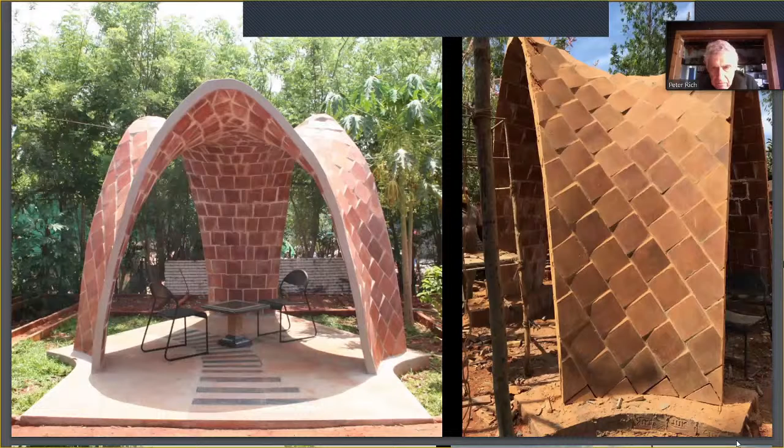He started with some experimentation of his own as an architect, using predominantly square tiles, and created a little folly in a garden.

What tends to happen with a lot of these experimental projects, you can go to the roofs of universities in America, Europe, Cambridge, and I'm sure in India, where there's always a workshop that attempts to do this over a weekend with students, but it usually ends up with something that's not usable. Also, as architects and students, you always look at the end product. You don't look at the process, or the trial and tribulation of actually getting to that point where you have the polished end product. So we're going to take you on the dirty journey to see how it happens, and what lessons you can learn from both failures and successes.

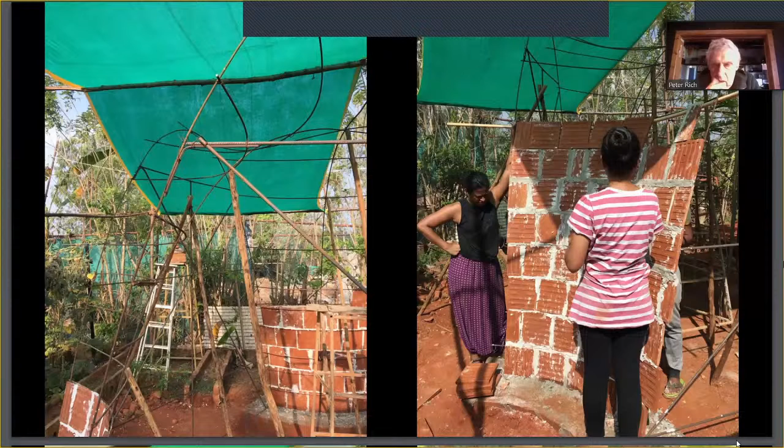A lot of these projects involve students. You have too many students, so a lot of them stand around with their hands on their hips, not knowing quite what to do. So it's an interesting thing. What I normally do is say, well, we're building this module, and the next one you're going to be building unassisted, so you better pay attention. Then you get a change of attitude, and they get involved.

But you can see here, you've got tiles, you've got fast drying gypsum, you've got shade structure with bamboo, which you improvise so well. But what's ingenious here, which we'll see next slide.

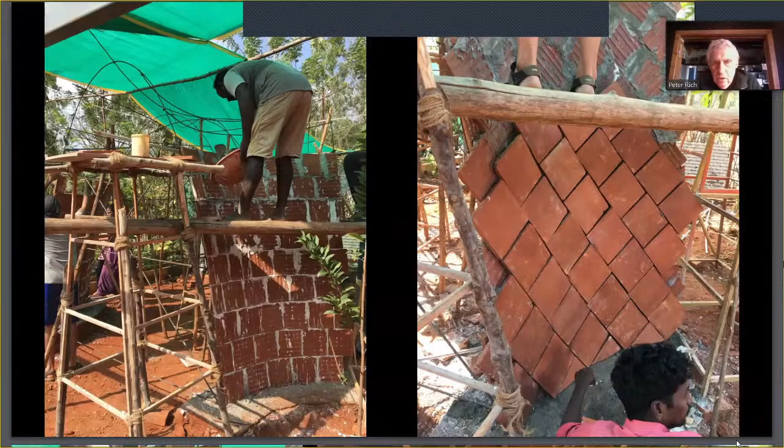What's ingenious with Cintil is that in all of these projects, the problem is how to get the mathematics right. He actually found steel rebars as the ingenious way of creating the formwork and having them follow the principles. So even MIT and the more learned schools have suddenly thought, oh my goodness, it takes someone from India to teach us this profound common sense, which I'm so excited about.

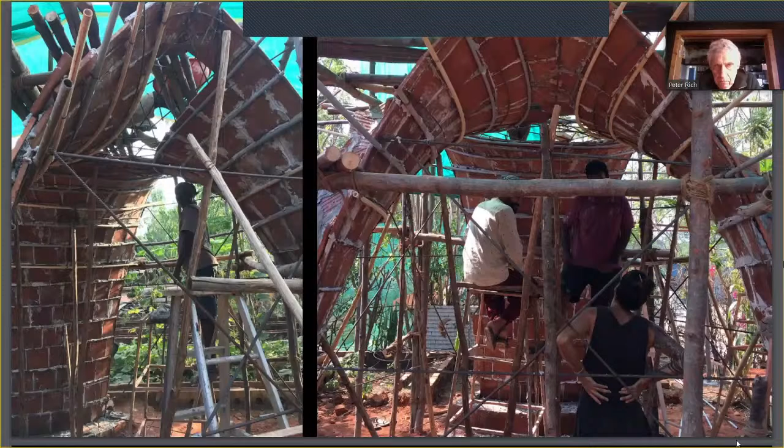You just have the courage to do it. You can see here, you've also got bamboo that has a certain level of bend in it as well. So you're improvising, and you're not going to great costs with scaffolding. And the steel rebars can be reused, welded and repeated.

Now we go to Bangalore. Here Cintil tried something in a public space, having done that first adventure, and succeeded. We can go through these fairly quickly.

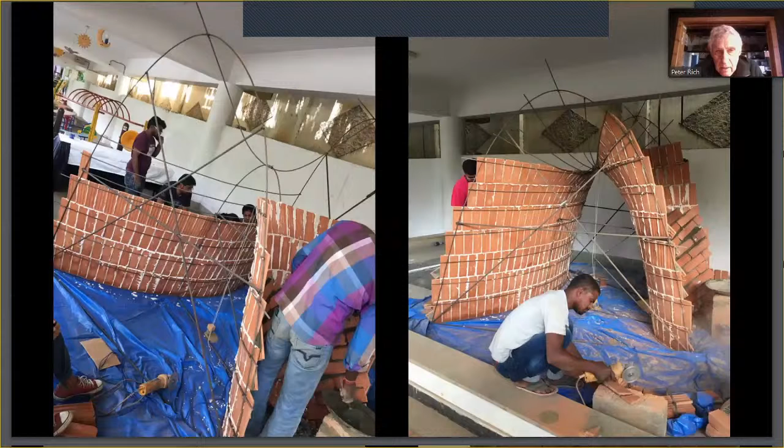Notice it's bent in plan and it's bent in section. So I said to him, great, now that you've done this, here's the process, and notice it's got the catenary arch at the end, one in the middle, and one in another place, and that gives you the profile. Then you link the apex, and then you link the side pieces.

And what does it do? It gives you a formwork. It's ingenious to work against.

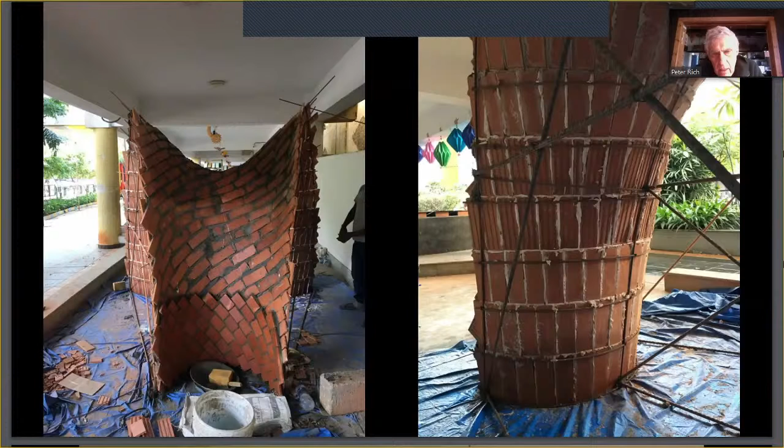He's working on a flat concrete plane, so the forces gather, and it wouldn't be as stable if the base was straight and not bent, because it adds to the strength, as you'll find with a piece of paper that you put in your hand.

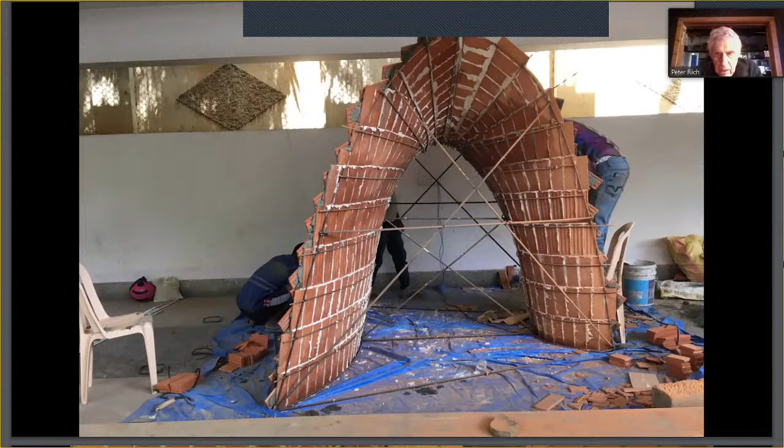And so the process goes, and then you can trim it.

It required a bit of a generator so that you could actually have an angle grinder and maybe a welding tool, but it didn't require anything more sophisticated than that. And that's what we're looking for.

That's the advantage we have in the big populated Southern Hemisphere and India, with our labor and skill, and the fact that our monetary system is not such that we can't do anything. The problem with America and Australia and places is they can't afford to work with natural materials. Everything's fired in a kiln, or be it steel or aluminium or pre-manufactured, sophisticated, high-embodied energy, because their money doesn't allow for you to work with the earth.

We have that advantage, and it actually sets up its own psychosis. Glenn Murcutt has spoken about it, where you get people who just don't have contact with natural materials anymore. Everything's slick. It's like you go to America, every university is like the inside of the latest motor car. And you actually yearn for the haptic sense of touch. You yearn for the smell, you yearn for the taste. I've designed some buildings where people actually go and lick the walls.

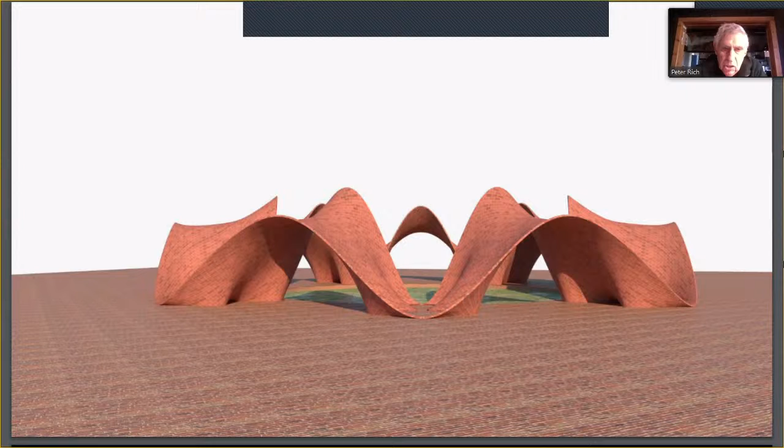Everyone tries to actually do this, but what you don't realize is that at certain points you're putting what wants to work in compression into tension, and it's going to snap. So, wake up call.

The Care Workshop in Tamil Nadu. This is where we interacted.

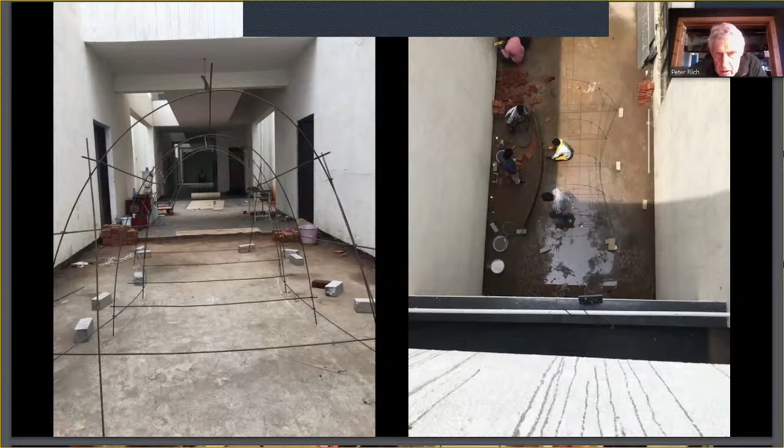He had done some preliminary work within that beautiful complex of buildings designed by Sanjay Mohe. I think it's a wonderful, wonderful school, and just the way it deals with climate and environment, and what Sanjay's learned from the IIM that he's had the pleasure of working in, of Doshi's in Bangalore.

And so here is, again, this idea of a long fluted cone. Cintil's learned that you need to actually not make the base straight side walls, you bend them. We can go quite quickly now.

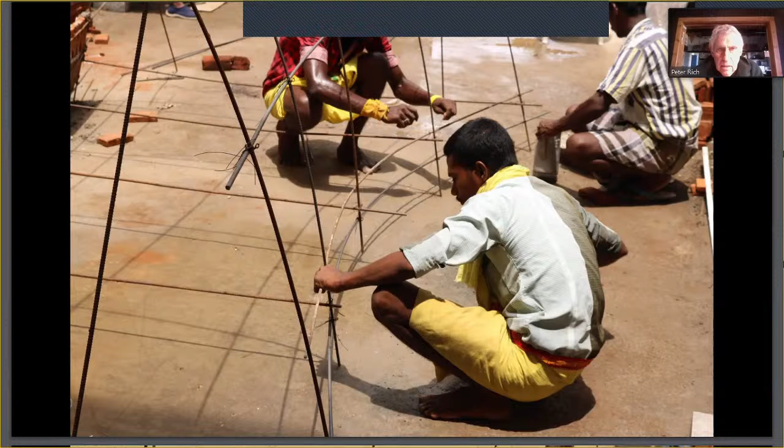And so with those fundamental lessons, he can build. He's also realized that it makes sense to get a more rectangular, smaller tile rather than a square tile, because it's just easier to work with.

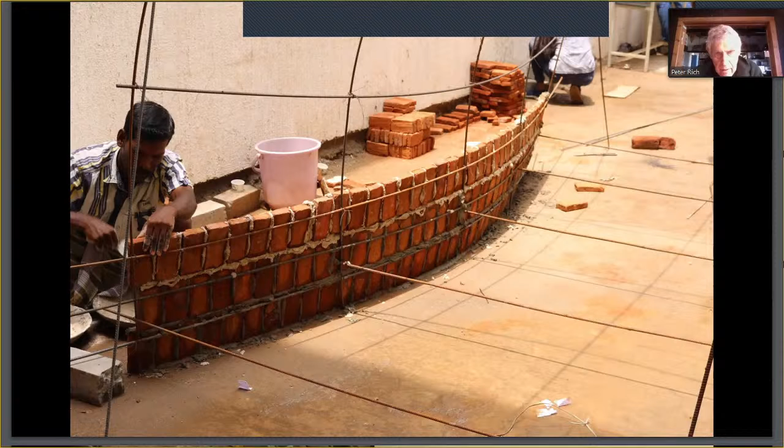And here we are, your three first courses. Hooray. And you just keep going. And it's fast drying cement.

You've got enough guidance, and you've got one team on one side and another team. They might not meet directly in the middle, but if these are handmade, as these tiles are, you tend to get a much nicer effect than you do from fired tiles. You're cancelling out the embodied energy, but because of the handmadeness and where they don't meet, it becomes a little bit like that beautiful mend on a calabash, where the mend becomes the artwork.

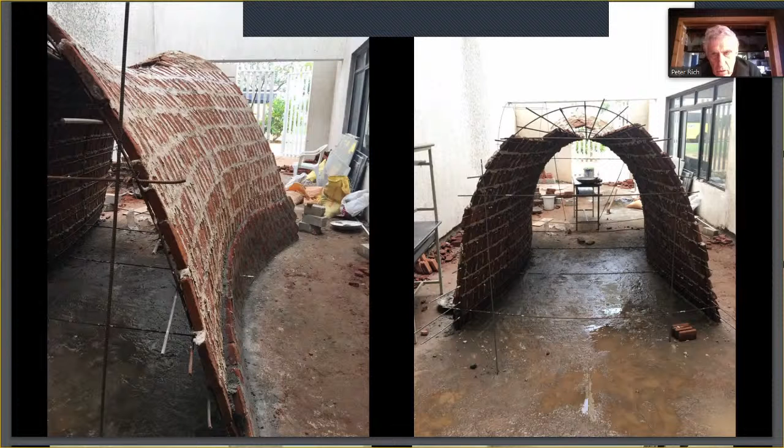Okay, almost meeting, and then meeting. And then the second layer of tile bonds it, usually on a diagonal. Then you remove the shuttering, and you're overwhelmed that you've actually succeeded in this. A lot of water and a lot of mess.

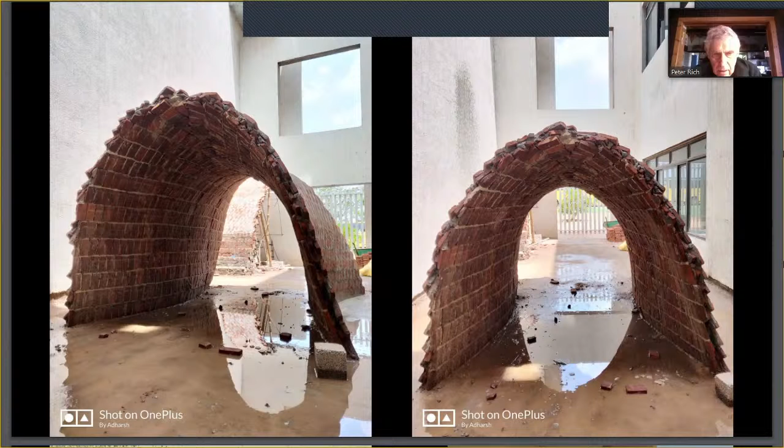But behind, in the corner there, every Timbrel vaulter wants to build a staircase that does this. They had a rather unsuccessful go at it, I think, overcome with enthusiasm but maybe not the skill. It didn't quite mature, but they'll build it eventually.

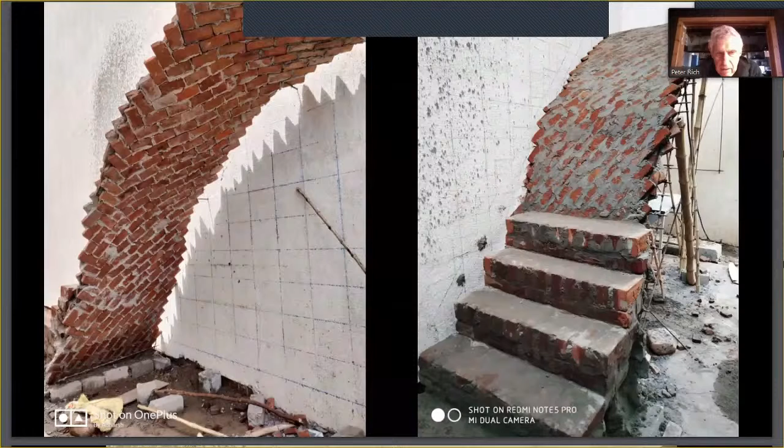You do this and then you put the treads on it. And then you get the one that's actually spiral, which is so captivating because it flies in space.

Okay, this is the one which we did. No, sorry, I'm jumping the gun.

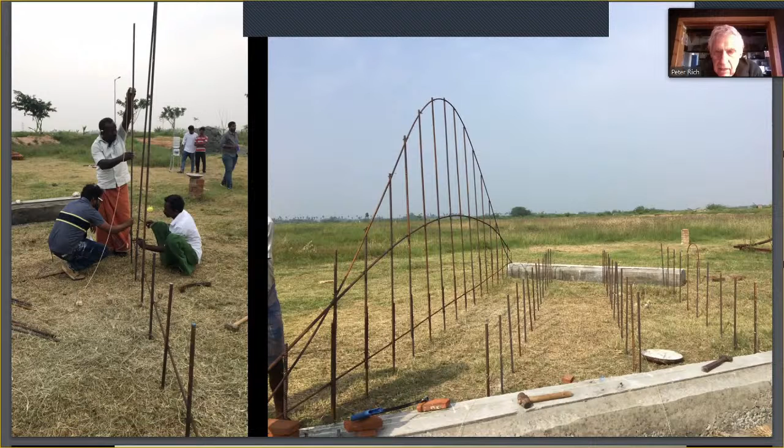He then went out into the field at Care, with the dormitories in the distance, and tried to be very experimental here. He wanted to build something actually much bigger. So here we are, he's setting it out. He's building it on the grass, but he's having the side horizontal bearers, which are concrete.

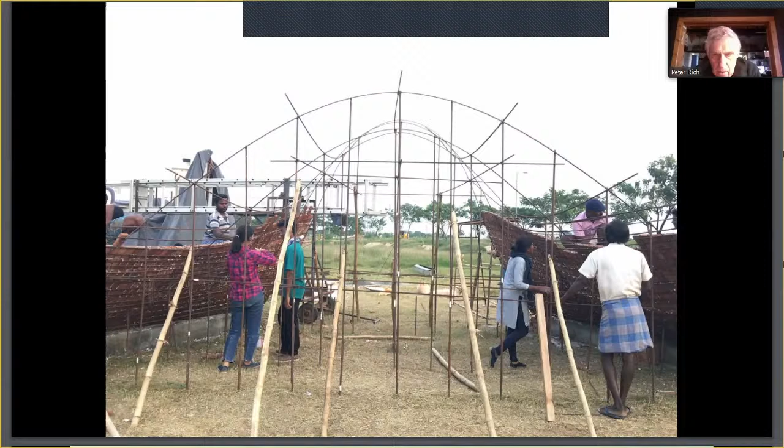Now you'll notice here that what happens is you get the double curvature, but when it gets down towards the ground, it starts flaring. That's the last thing you should do, because instead of the natural force wanting to get to the ground, you put it in tension to go sideways. We'll see the outcome of that.

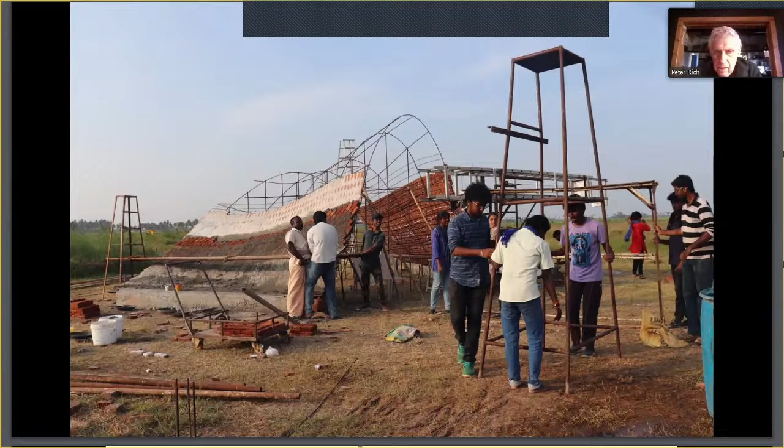But I just love the enthusiasm. And also it ends up being straight, not curved at the sides, so somehow you actually contradict the principle.

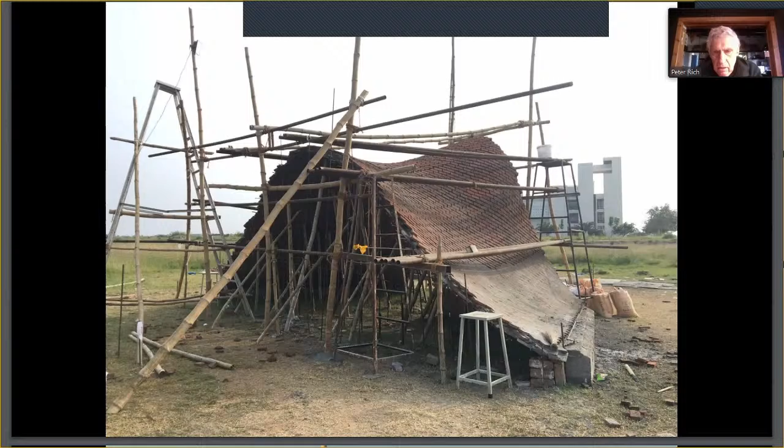So you see, you want to give it a bit of flair, and you literally give it a bit of flair, but I'll show you what happens.

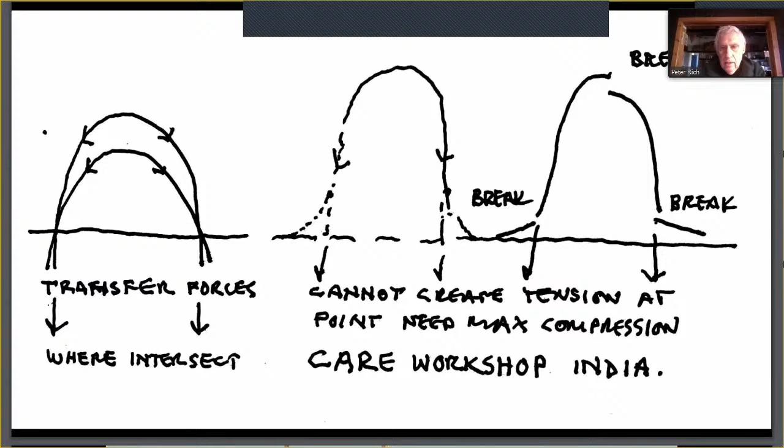When you bend it like this, it wants to go straight, but it doesn't, so it's going to break. Let's have a look at the next one. And it does break. It breaks at the sides and it breaks at the top, so the whole thing collapses because it's put in tension.

Okay, here's the one where we meet, in December 2019. And we had a wonderful few days. What we wanted to do was show them what they tend to do in Spain.

Everybody gets given a piece of cloth and some plaster of Paris, and you make a shape with wire and dip it in the plaster of Paris, and voila, you've got a model of what your thing is. But to make it, and to have the formwork that makes it, is the perplexing thing. We'll show you how, when you get into model making in the studio, it always ends up being this gloopy, floppy thing that isn't very convincing.

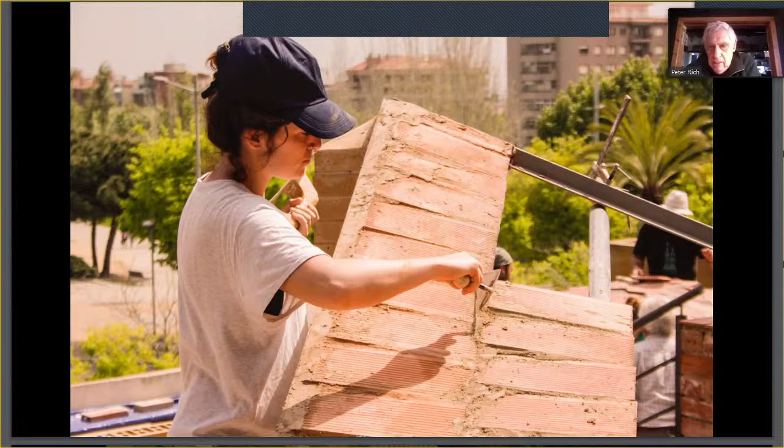This is in Valencia, which is the home of the Catalan Vault, with some steel structures providing an end. And we'll just go quickly through these.

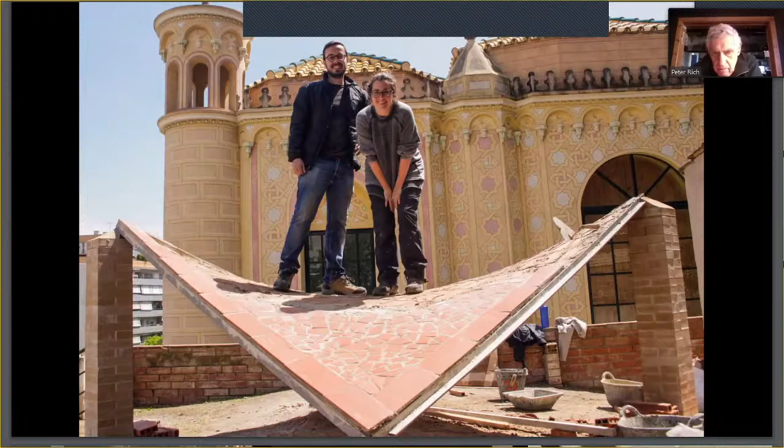And it's a weekend situation. Next, you can see that you get a very nice finished product, which becomes part of a yard. It's not necessarily useful to anybody, and I'm now getting schools of architecture - whenever they do something, it actually acts as a piece of furniture, which is space making.

We in South Africa are finding that in a rural area, if we just introduce the whole business of access to data, in other words an iCloud, we can actually, with a Timbrel Vault, generate a whole new public space just by virtue of that. That's where the youth are going to gather, because they can have access to data. They don't have to go and line up next to the bank in town where they can only get data.

And the model building - you know, let students have a go at it. They tend to get a bit complicated. They find it's difficult to actually make the form. If you're going to put it on a printout, it really cheats because it doesn't help you with the process.

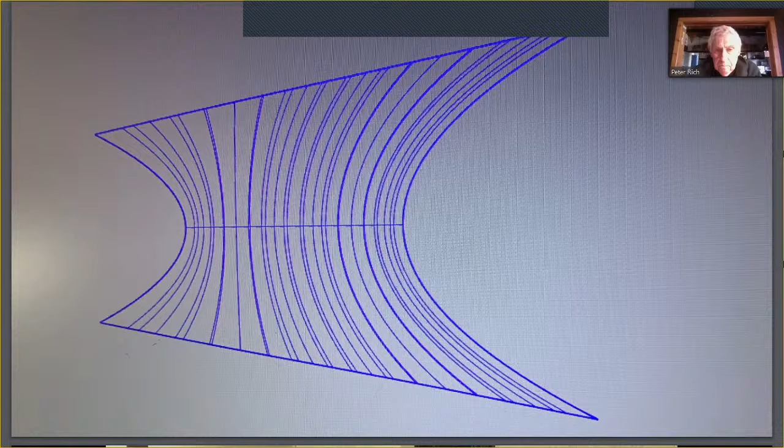And then we said, okay, we've got these wonderful areas where we can do it. And on the right is Belinda, who's the head of the school, who was present night and day. And we said, okay, how do you actually set this out? How do you start with the mathematics? And how do you get in? We photographed the process, and we got the students involved.

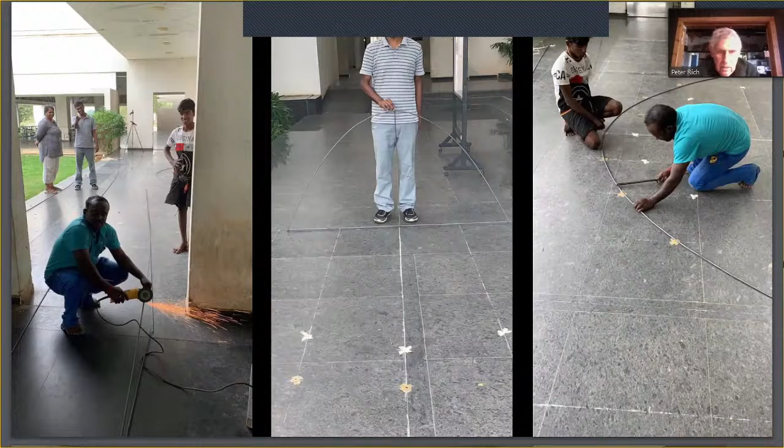And notice you've got a linear line, so you're working orthogonally, and then you inevitably involve the maintenance man and some villagers because they get empowered, and you can actually extend this whole lesson, as is going to happen with Surya's project.

And here's the relationship of the dining hall across to the residences, and we're going to build on this site where we've got a little bit of unevenness, but it doesn't matter. So the process starts.

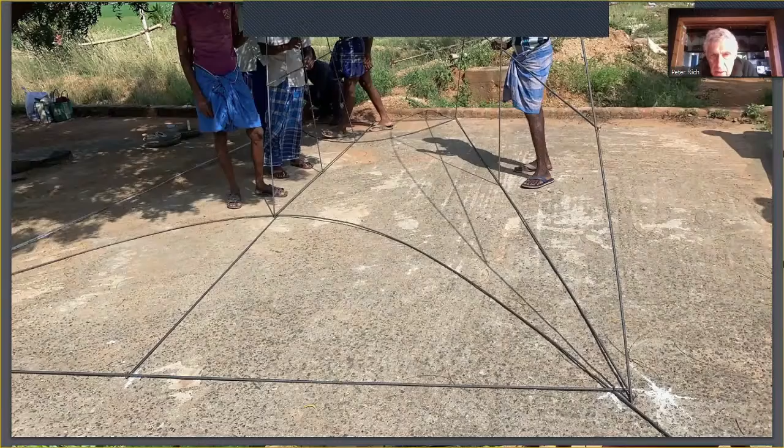Okay, and we're getting the two ends right. We're getting the middle right. We're getting the central one right. And then we're doing the weaving on the side.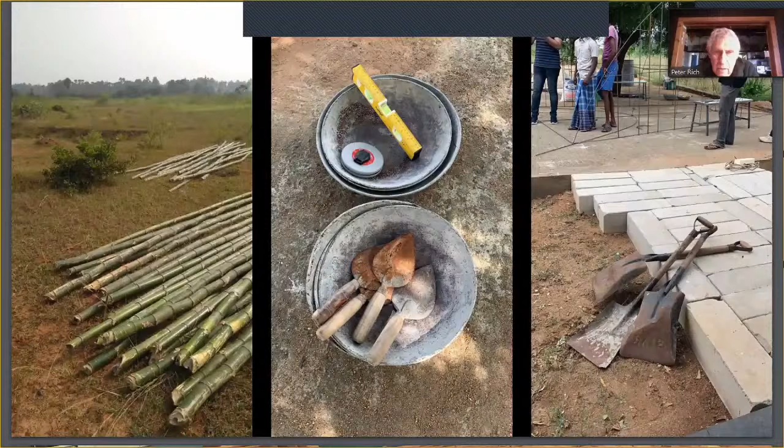But then you've got the villagers and you've got the other skills that come to the table, which you're so fortunate to have and which need empowering in the context of India, more and more so. And you've got them coming to the table because there's pending rain and monsoon, and there was a cyclone going to whip off from the east coast.

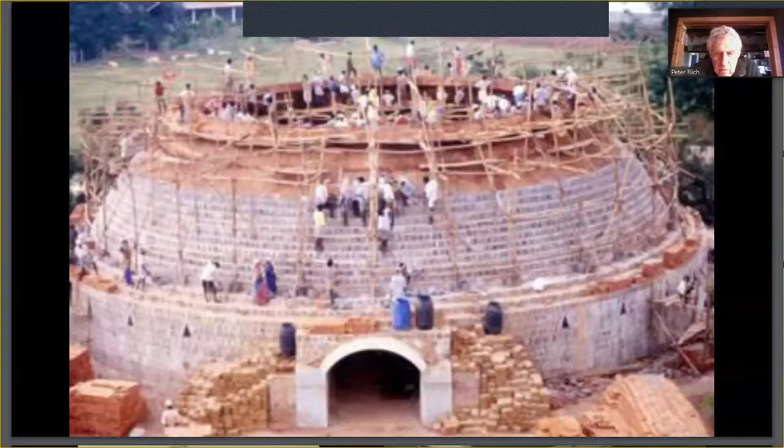Next image. And the tiles, when we built Mapungubwe, because we were working with Cambridge University, with one of the pupils of John Ochsendorf, Michael Ramage, their civil engineering department said, let's see how weak we can make a tile. So we only made it 4 MPa with 5% cement, which was hand-pressed and cured.

But you have this tradition, you've got to go to your great Buddhist temples and elsewhere. It's all lurking there, it's all there in India. You go to Hampi, you go to Mandu, you see little bits of Italy, you see what happened along the silk trade. You see the hybridity that happened and the swapping of ideas and the trying to develop an identity in one way or another. But there's this incredible inventiveness.

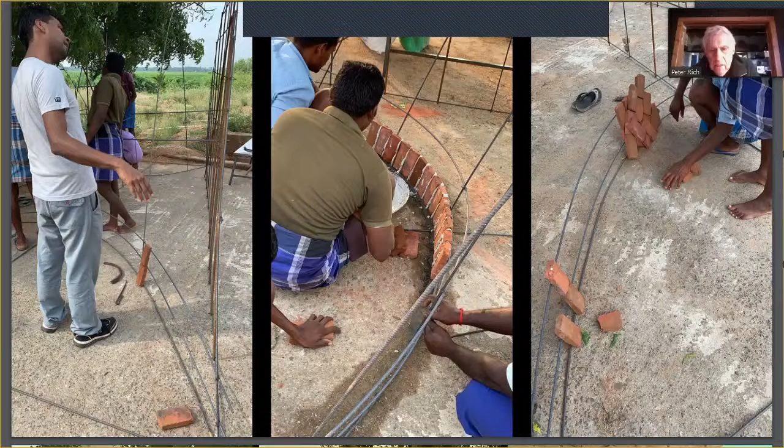And you need to, while you're doing something like this, visit the temples and visit the flower market to get away and then come back, because it's part of the journey. It's not just being there.

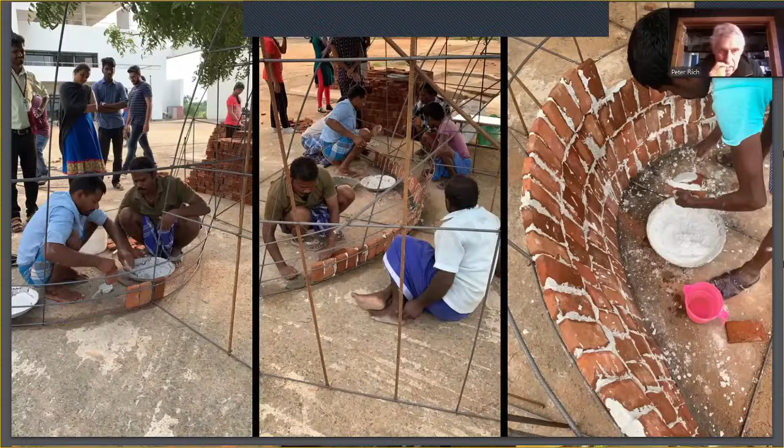Some mistakes are made, they actually get corrected, and then you actually get a real production line going, and you find who's good at things, and they take a leadership. And what you need is several of these being constructed at the same time, but we didn't have the budget. Hopefully after COVID, we'll build the subsequent ones as an exercise each year until the whole entrance sequence is ready.

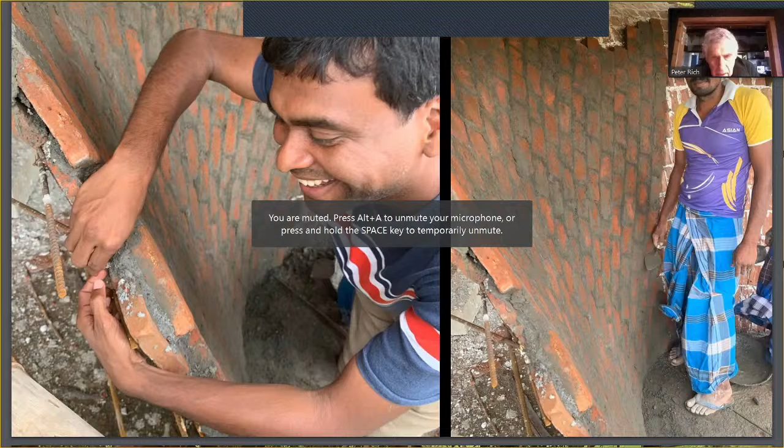There's Cintil in his element, because it's really working. And just the discovery that your second layer of tiles goes on the diagonal, because that's how the forces work. And then you put the other one going the other way, so it gives you this triple strength. But you have to decide which way you want the tiles to go to read underneath, because that's your ceiling.

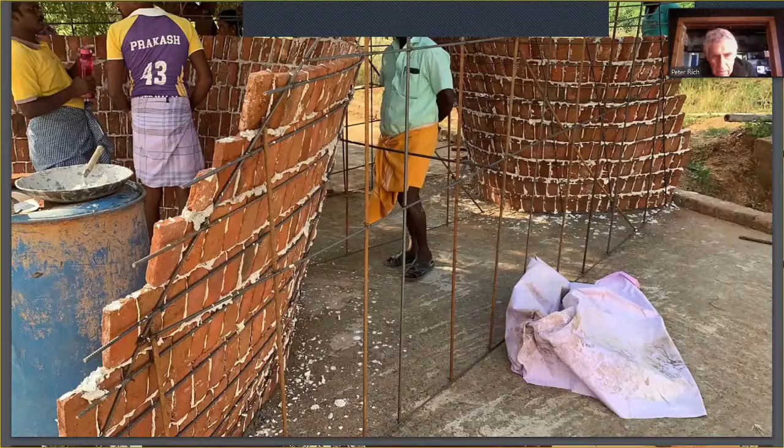And there's the ooze. You'll see when we worked for Prince Charles in London, he wanted the ooze, but you can clean it up. And students started really participating, realizing we need to get the tiles, we need to hand them on, there needs to be a production process, we need to coordinate.

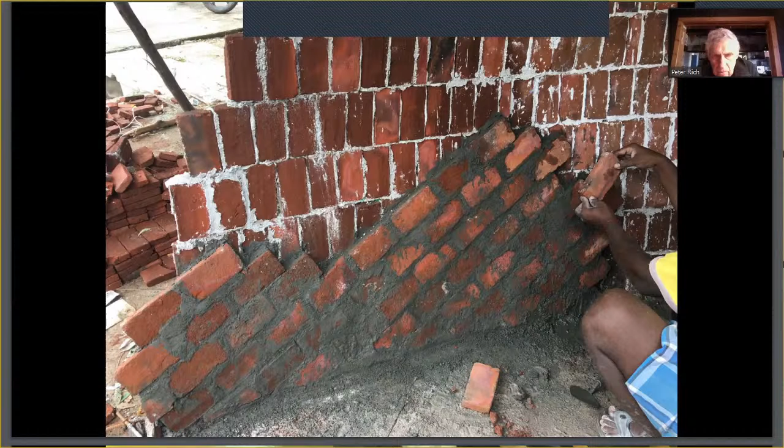And yeah, the diagonal. And you don't need particularly skilled masons. It's quicker, but the students started getting pretty good at it.

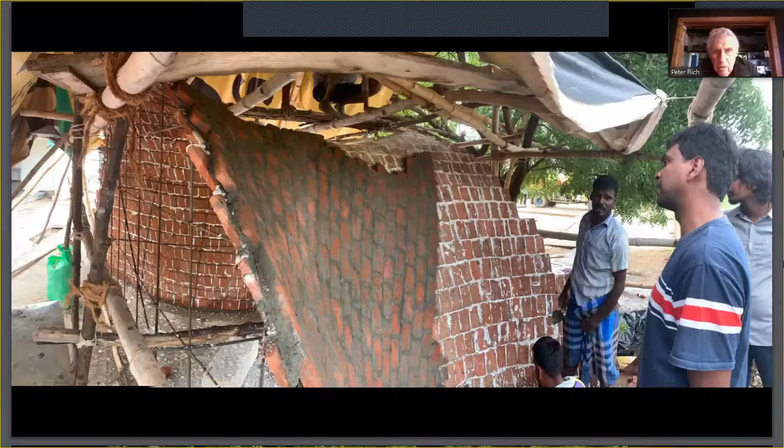We got our structure up because the rains are coming and we want to work while it's raining. And suddenly we've still got our spider's web - I like to use the analogy of a spider's web, because a spider's web's got a structure to it, it serves a purpose.

Here, Cintil has come up with a formwork that follows the mathematical lines of force, and it serves as support structure and guidance, and can be reused.

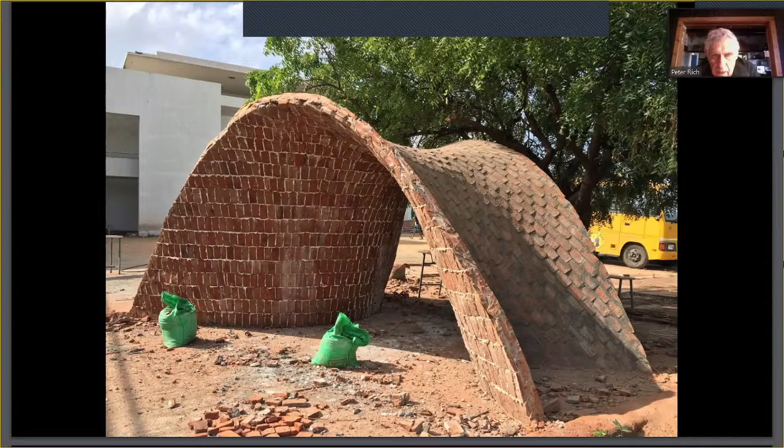And then the trimming that happens and the finishing. And it happened to pick up nicely with the afternoon sun, and stands very nice and complementary to the very orthogonal architecture of this particular Sanjay Mohe building. And celebrates the tree.

And the classrooms are open like this, so you have outdoor spaces, and you have all the lessons from the IIM and the School of Architecture, which are marvelous because you're in a village. And there's that web between inside and outside.

My book talks about that. Juhani Pallasmaa talks about, in my own work, the weave that I do between indoor and outdoor spaces, but also the weave between understanding different geometries that coexist with one another. But it's very, very worked through and understood with iteration after iteration after iteration, that it becomes this very rich environment.

And this is meant to play, but you know, we got into dance. Students found it very funny, but it's fine. I'm from the 60s.

And then just a reminder about these 5 elements here, we built the next one. You'll see once you build others, you start looking at permutations. If you build them identically, you can get this very nice walkway where you have head height, where these subspaces occur, and they start defining spaces of their own where you can go and sit. So you can take a place that has no articulation.

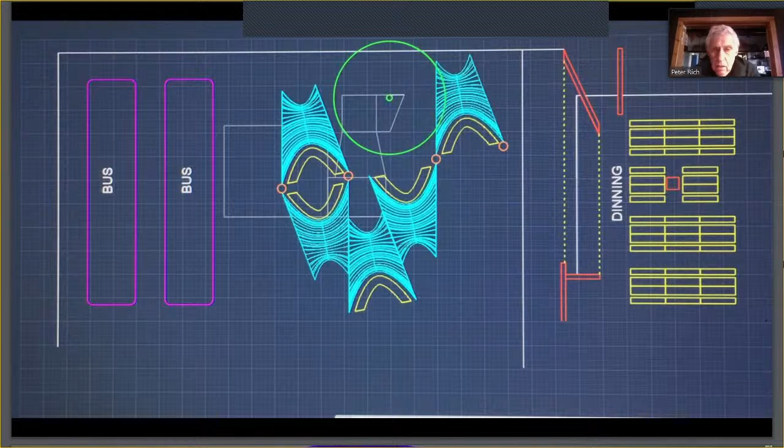Okay, just a reminder where we came from. So there's the theory, there's the mathematics, there's the practice. Get hold of the BBC program called The Code, and it shows you there's maths in everything. There's even maths in the way a flock of birds fly. There's maths in the statistical number of fish a fisherman's going to catch. There's maths in the way people move across a big space, and if you put an object in it, how it alters that.

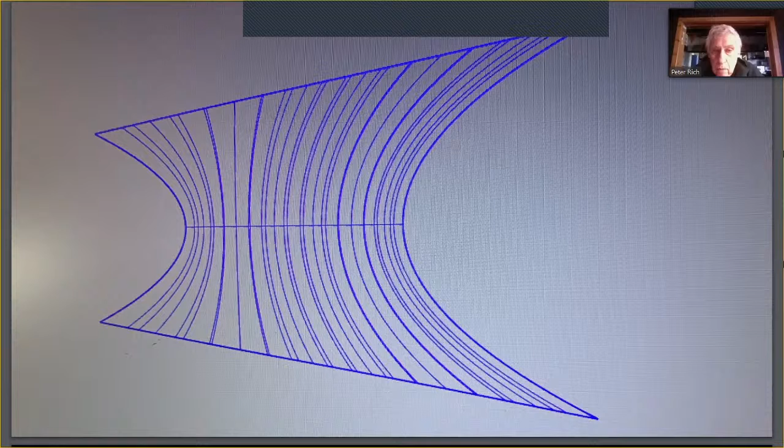And you don't have to become a mathematician, you just got to actually think. When we won the Earth Pavilion in London, Prince Charles asked us if we could—he was going to have a tea party, and he wanted, on his lawn of Lancaster House on the Mall, to demonstrate to the English innovative ways in which you could think differently about being green, for want of a better word. And we built this.

We had 14 days from the phone call to walking through the building. So we had to think, we had to design, we had to think about flying a hand press over there, making the tiles, and then what sort of formwork do we do? We bypassed all the conventional ways.

We had the organizers of the Earth Awards second a project manager, who we sent on holiday to Italy as a way of getting rid of him, because it would never have happened. And we got hold of a colleague of mine, Tim Hall's, some set designers who quickly made some formwork for us. We didn't have Scud with us at that time. We got bicycles, we got a builder, we got a female mason, and we just did it.

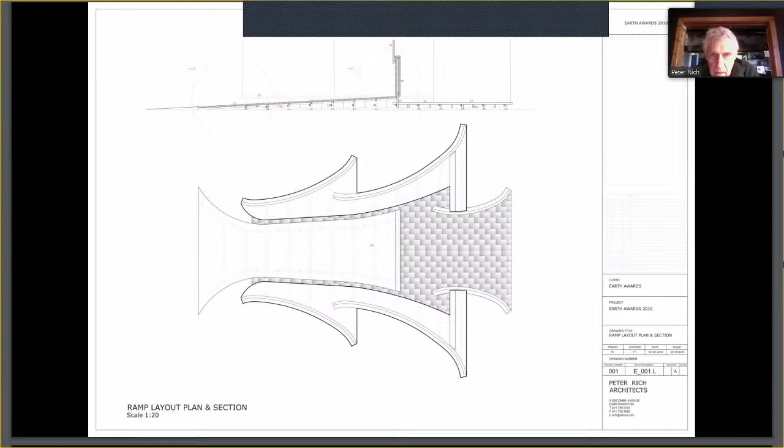And, you know, we needed the curvature, and they really liked the fact that we had this idea of a series of cones that went through one another. And this has led to lots of subsequent designs.

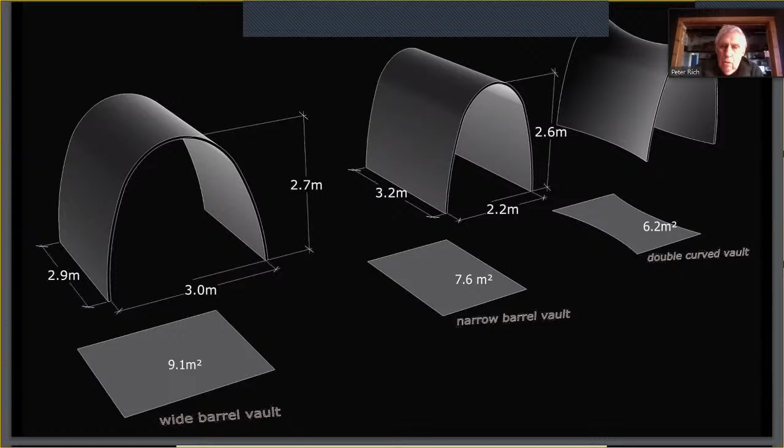You can see here, you've got the wide barrel vault with the sides straight, but that's going to be floppy. You need to go to the right-hand side where your two sides are bent as well to give it strength, and you also need to bend the top of it. So then you've got strength happening in section, in elevation on the roof plane, and in plan. And that's the way to go.

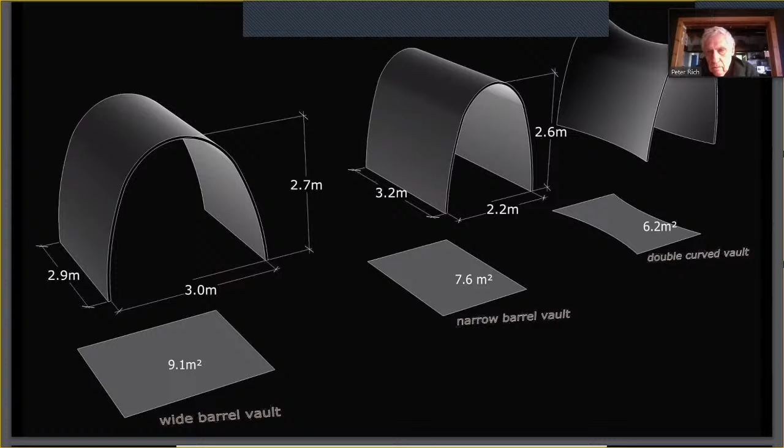And I did some drawings very quickly and sent them over. Prince Charles insisted on these pieces of timber, which we used from—it's the intrusions into the game parks, which is called sekelbos. You take it out because it's an intruder. We used that, but we ended up using cherry blossom here because he liked the roughness of it, because he had seen it and it captured him. Notice how we bend this to actually form the gutters. But as soon as you bend, you've obviously got to get more skilled as a mason, because your tile has to be cut.

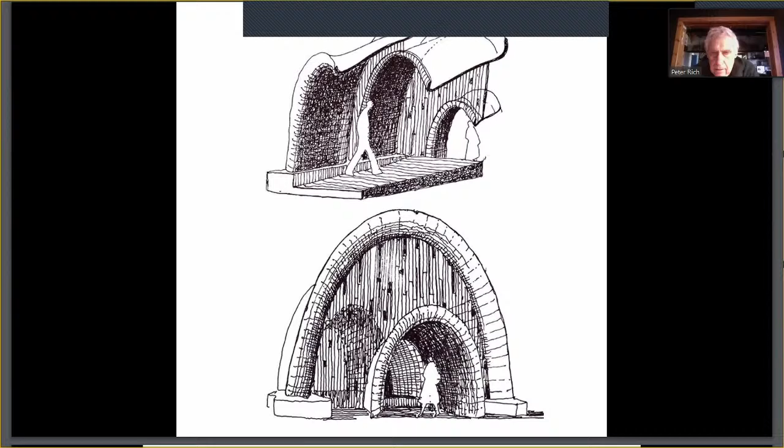And here we had it with straight sides—doesn't work. There we had it like that—works better, but still doesn't work. But this was on the computer. We solved it in an analog way.

And there we are, it was a temporary structure, so we actually put down chipboard, which was raised. We built on the chipboard, and then we took it from there. And all our detailing is done this way.

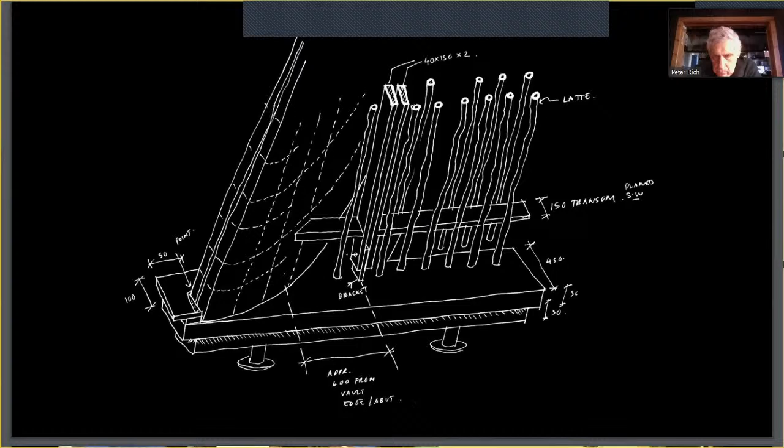And these pieces of timber we used in between the tiles, we used as the flooring and for the exhibition. So we reused every aspect of it. That was a great success.

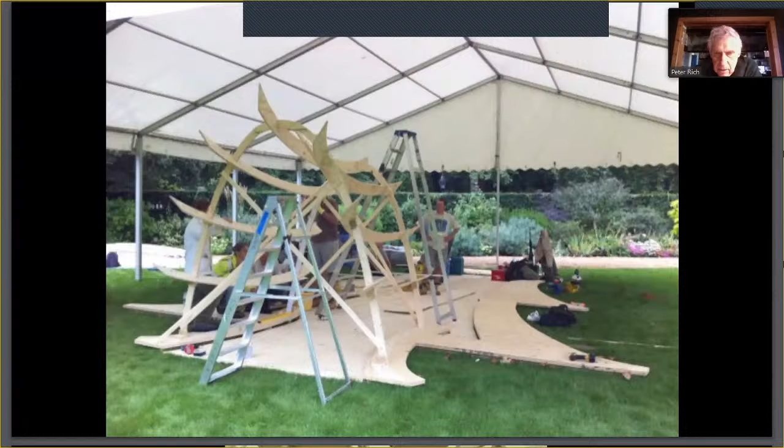And here, it rains in England intermittently, so we put shelter over. That's how we did our formwork, just done by set designers digitally, no problem. You got ladders and we started. And a lovely young woman in her 30s from the south of England just was in her element.

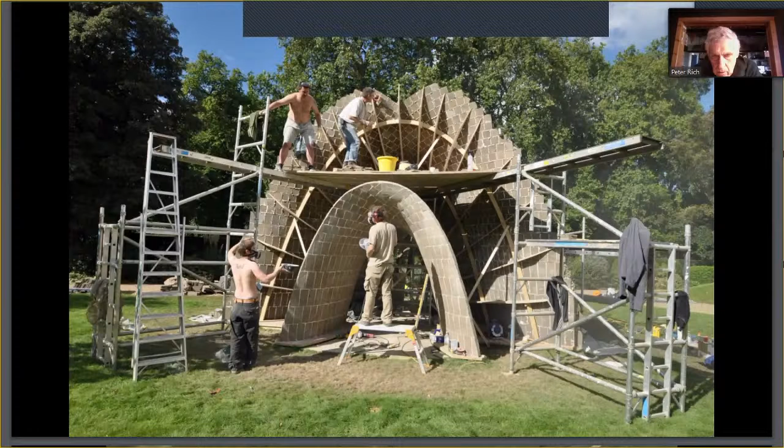And it worked perfectly.

I think it's the end product. And it's interesting, we did one of these in Chicago for a billionaire, and he loved the ooze because he says everything's so high embodied energy and machined in America. People don't know how to make buildings that are delicious, that you can smell, you can touch, and you can eat. I want the ooze to happen because it gives a shadow line and it gives character.

Here you can see we've actually taken what we used as the elements for making the tiles, and we've used them in the exhibition and in the floor. People loved it.

This was meant to be dismantled after a couple of weeks. Because of the 14-day time frame, we couldn't even think of how we could, even though it was made in 3 sections, transport it somewhere else with a forklift and put it down. We just didn't have time to think on our feet.

Now, at the start of COVID, we got this request from a wealthy person with a dream, from London. He'd seen our work. I was in India - this is really done by the office, not my work, but you have to give some leeway to the office. Basically, he wanted to design a dome where at a metaphysical and philosophical level he could come to terms with his place in the world.

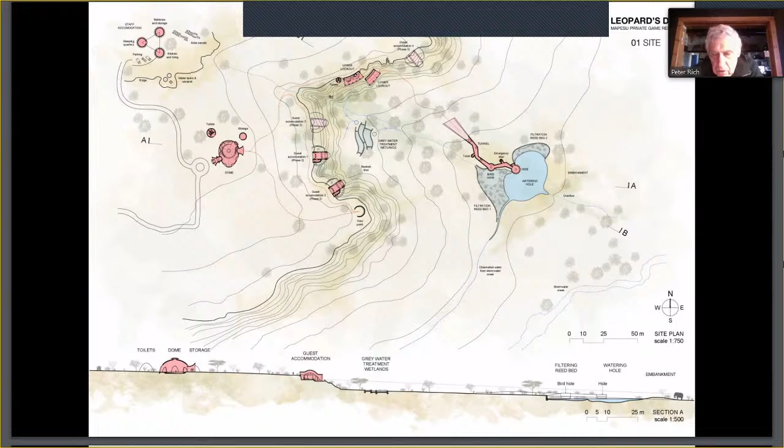But I'll show you why I'm showing you this - I'm also showing students, you need to dream. How do you, at the edge of a cliff face, just create a shelf off the cliff face that's not obvious? What form does the dome take? What sort of accommodation do you do? How do you start reading the landscape?

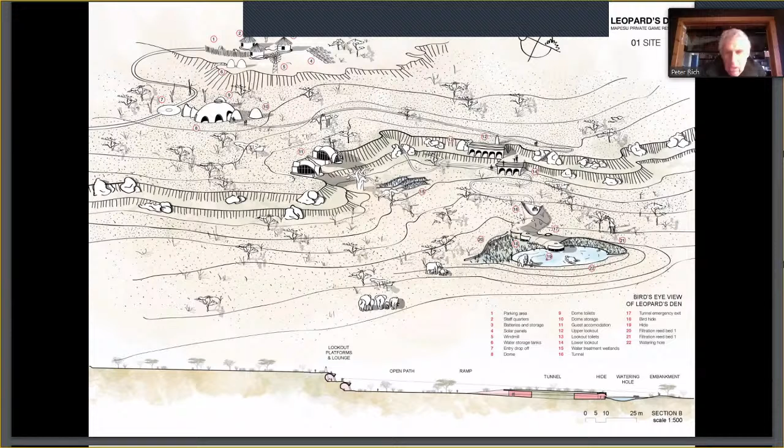And if you look at the section down below, how do you learn from Gaudi how you can make this carved out thing along the landscape?

This is particularly ugly and doesn't work. We all know when you enter a circle, the ideal way is not to do it like the Pantheon. There are other ways of doing it. I find this particularly naive, but it's okay.

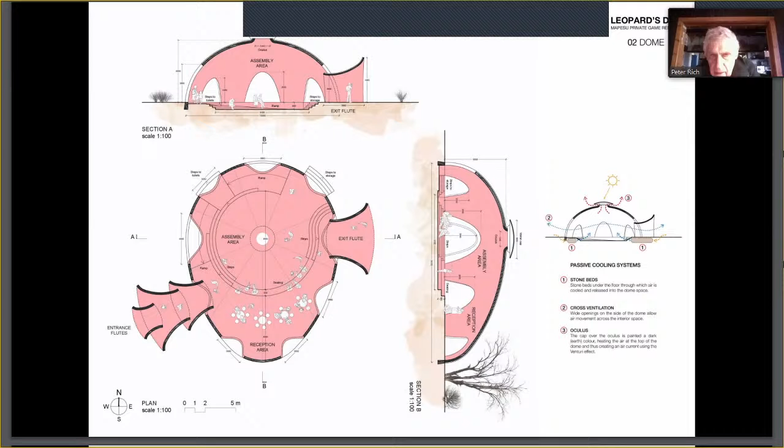He didn't want any steel. He didn't want any concrete, not even in the base. But we've won his heart, and we will get there, and it'll be something much, much nicer.

He's had a lot of time to think about it. This is learning from Gaudi's Park Guell - how you create a very nice place to sit and have a drink and look out and view the landscape, without being intrusive.

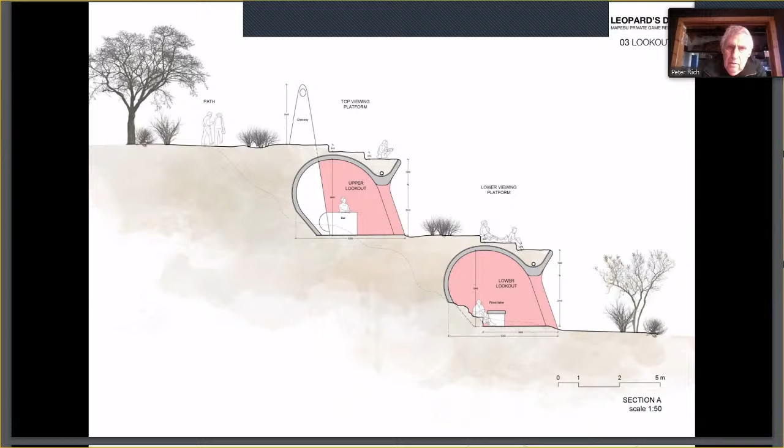And how do you ventilate it? What form should it be? I would do this differently, but anyway.

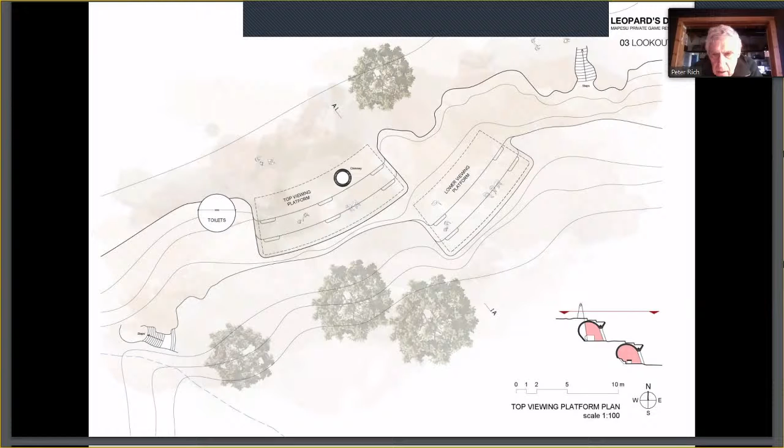It says much the same thing. What does it look like from the top? Do you make this look like an anthill? What are you focusing on?

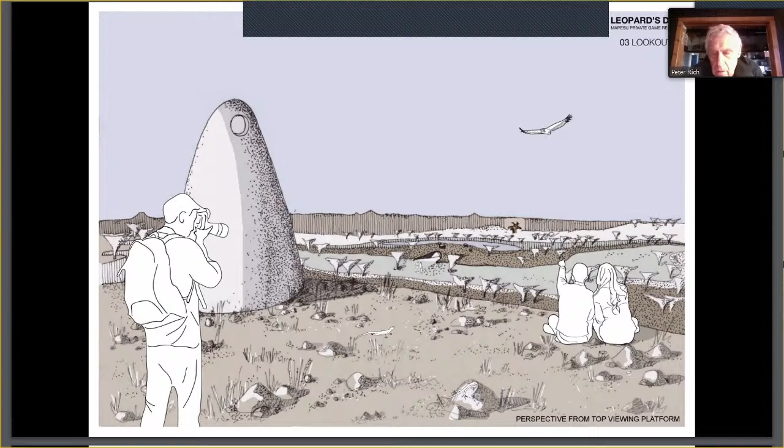And where do you serve drinks? Is it part of the landscape? Is it an attachment, like the buildings across the way stepping down, or is it in?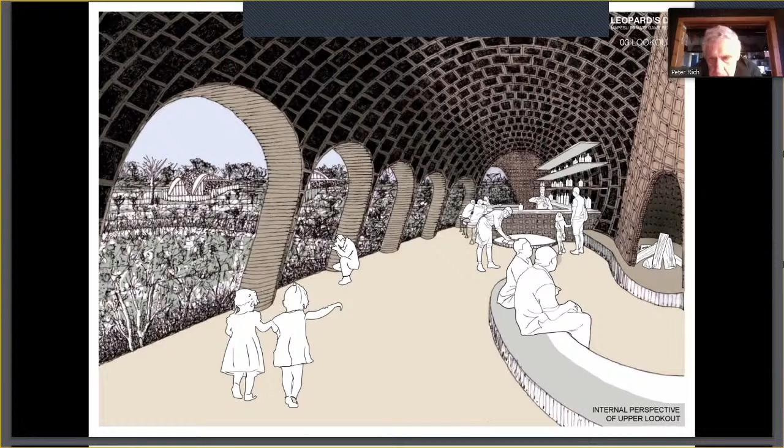And this tunnel that gets covered with sand has spaces that let light in, but you have different places where, from behind glass, you can photograph animals in the most incredible positions. This is part of his fantasy.

What I did is, when I ran a workshop with Valencia just before COVID - during COVID, sorry, I ran a workshop with them in November last year - we took this and gave different students each a slice of the tunnel to design, either in an analog way or on computer. We had half an hour report backs on process. It was a very successful exercise.

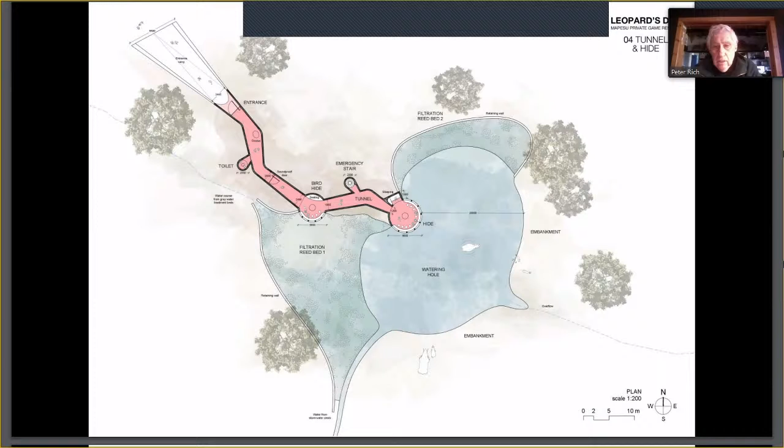They actually got to terms with the principle. What is it along there? Can you come up? Can you come down? Where do you look out? How do you ventilate? And how do the animals not smell you? It was nice.

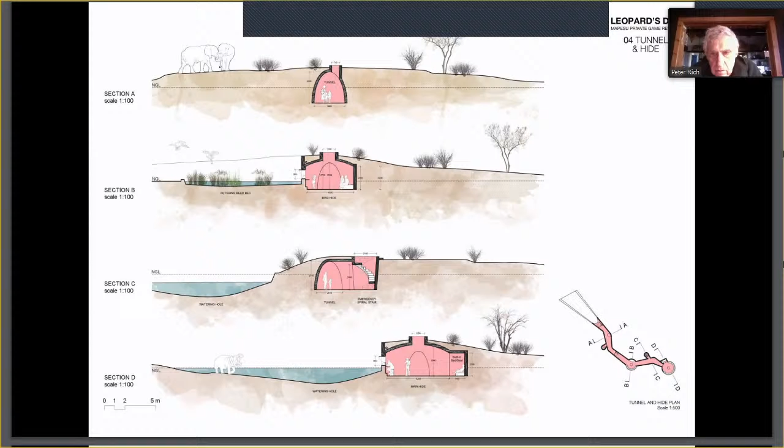So this is where you start. A client wants to see what your proposal is. At conceptual level, you don't want to show too much. Do you do a 3D model that's sufficient for you to do some freehand drawings?

And you're fulfilling someone's fantasy.

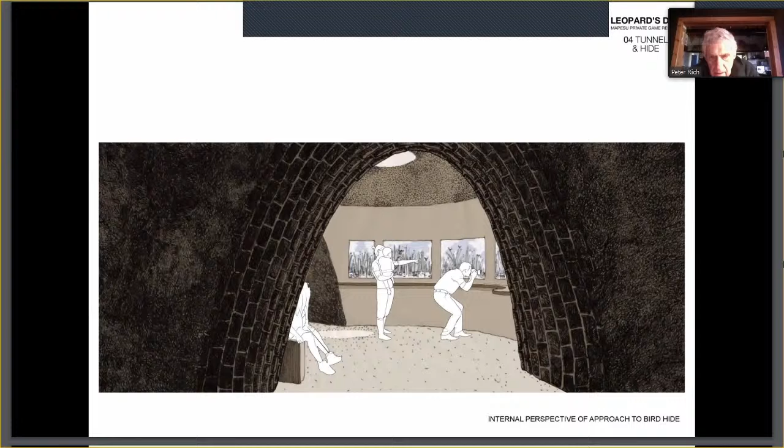Okay, so this is the dream for the view, and this is the model.

Now, before we go on to the next slide, we were phoned on Friday, and we're going down this next week, 7.5 hours, to a place in the middle of nowhere, west of Kimberley, where the biggest solar field in Africa is being built as a renewable energy source. And they want a visitor center on a hill. The environmentalists have sent us the most horrible engineer-designed concrete thing that just sits there as this building, but has no poetic quality. So we've got a Skype call on Monday with the CEO, saying, you're harnessing the sun.

That's what you're doing. And as scientists, you're doing an incredible job. Now, if visitors are going to visit this, why don't we actually do a dome with an oculus so you can experience? And when you get there anyway, you've got this blinding sun, with flat, long horizons. Why don't we take you into a world where you can communicate Ra, the sun god? You know, the 25th of December, the Three Kings, the Immaculate Conception, the dying on the cross.

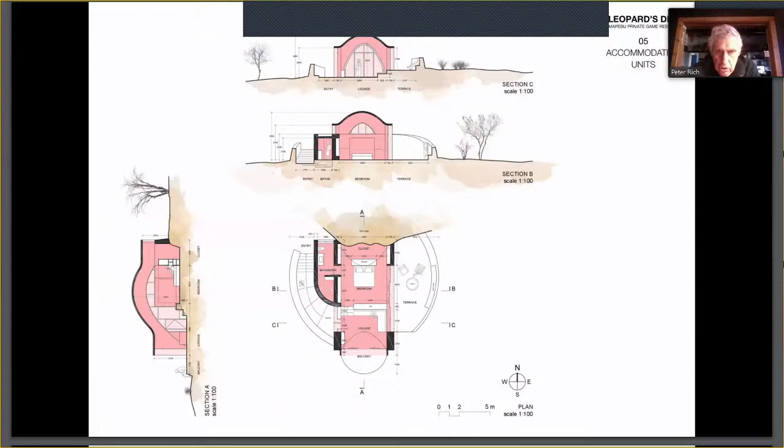These are the sleeping quarters, horrible drawings. Better drawings. Okay, so how can it look as though it's always been there? And you don't have to put stone.

And then I'm just going to show you, you've probably seen through the social media the beginnings of wonderful projects. I've got a project for a place to get massage floating on water, which is the inside of a Lotus Petal, which is a project I'm hoping to realize in China. My client wrote to me and he says he's gone back through all my projects that haven't been built and he loves them so much he's going to build them all. Hallelujah, I hope that happens.

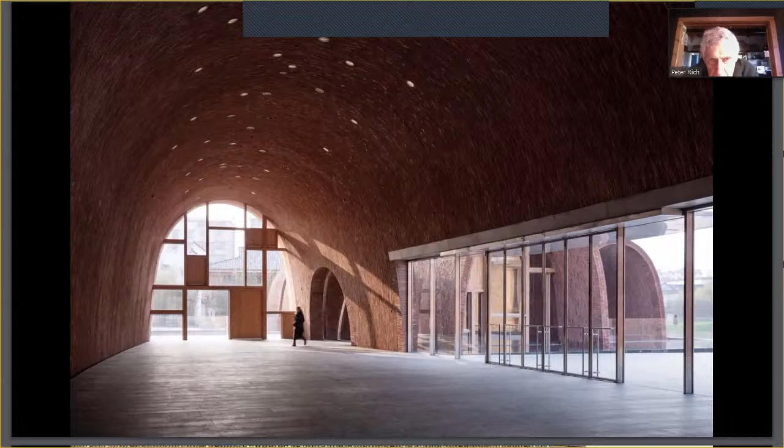Okay. And, you can make holes in it so you can create the sky. And the fenestration learns from Corb, and it's delightful. I'm telling my client that when I next go to China, I want to visit some of these projects. And especially the one that's coming up now. But notice where you break the order and where there's the intersection is where the magic happens. We'll talk about that just now, about breaking the order. But it's all working to the law.